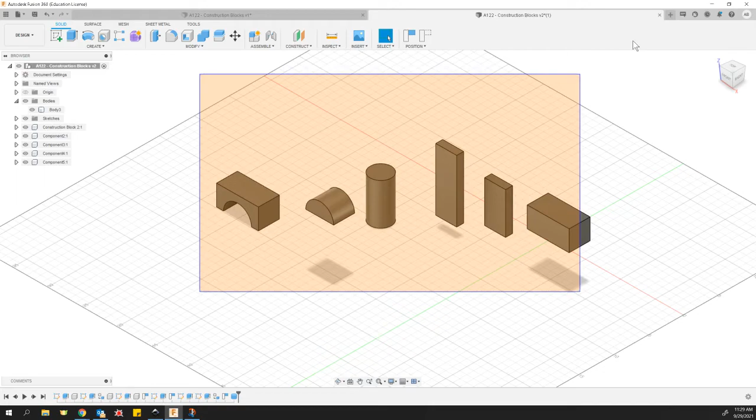So we're going to make this block right here. When you're done with all these and have them lined up like this, I'd like to see it from the isometric, the home view, and you're going to take a screenshot like this to turn in.

If you forget how to take a screenshot of those parts, use the snipping tool. Click on the start button to find snip and sketch, then click the new button, and drag a box around what you want to keep.

What's important that you keep here is your initials in the corner. I want to make sure that's in my screenshot, like you're an artist signing their work. You can even highlight it if you want to.

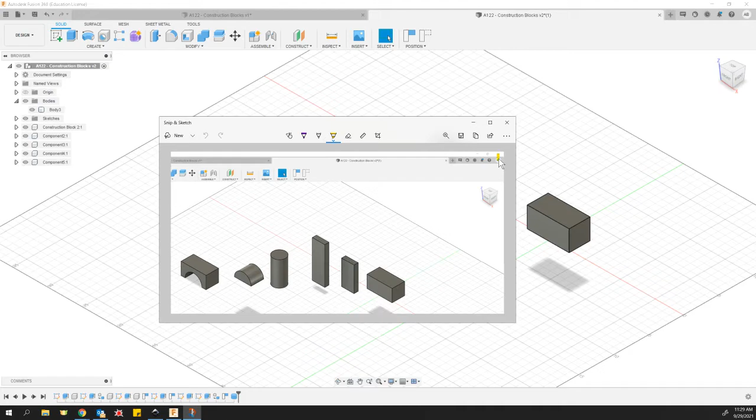So in order to make this archway looking block right here, I'm going to show you what I did. I'm actually just going to delete the part itself, delete my component.

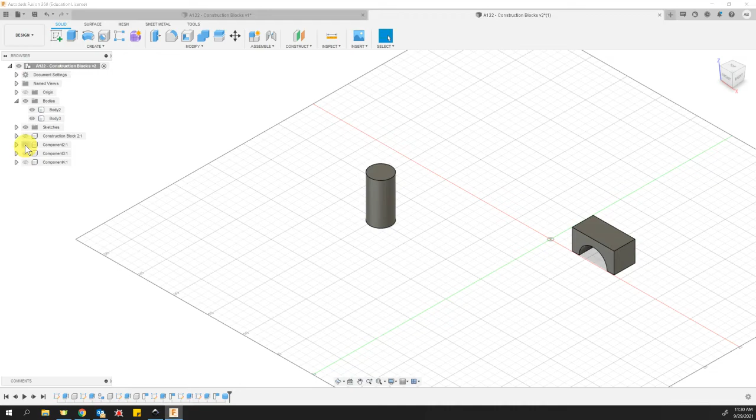Now you may have turned off or hidden some of your components. If you have sketches hidden, you don't want that. You can hide construction, you can hide components if you want, it doesn't really matter, just make sure they're unhidden when you go to take your screenshot.

Let's make this part right here. Okay, so I've got it as a body right now. One thing we're going to cover later: bodies are fixed in space, we can't move them. You see how I'm able to move these things?

That's because, not this one, that must be a body. See how I'm able to move some of these around freely? That's when they're a component. When they are bodies, they are stuck to wherever you design them in space. So to convert them from a body to a component, watch what I do here.

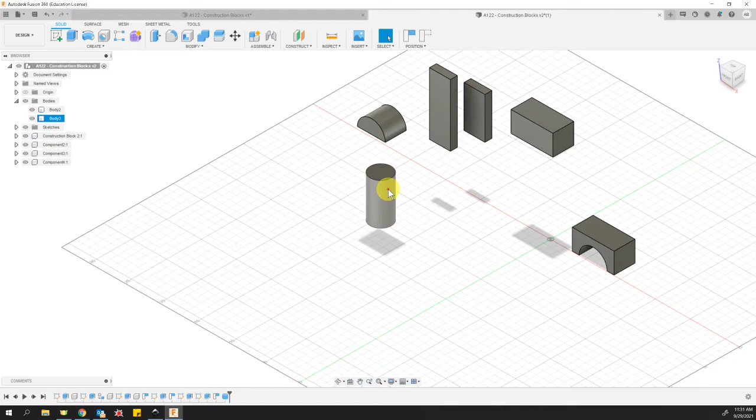The cylinder, I come over here and find body, right click on it, and create components from bodies. It converts it from a body, and now it's able to be freely moved about.

As I was saying earlier, I wanted to erase this archway and show you exactly how to build that. So I'm going to erase this body altogether, and we're going to make a new one. Now it's saying my sketch is no longer needed, so I'll delete the sketch too.

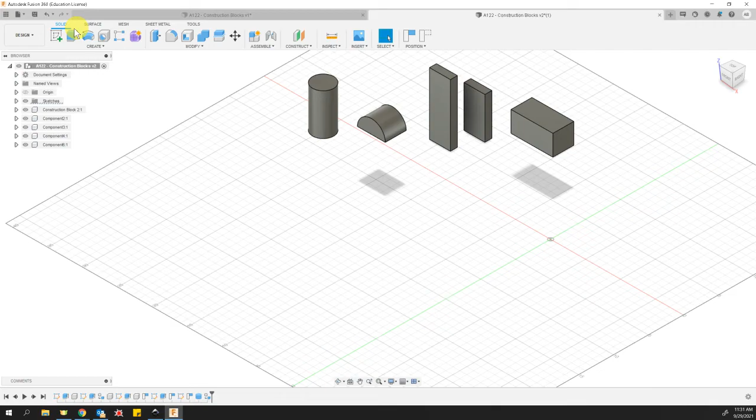To make a new shape here, I'm going to go up and create a sketch. I get to choose: do I want to sketch on the front, the side, or the top? Looking at what we're trying to make, I think it's pretty clear we're gonna sketch on the front, right? So we're gonna choose our front plane.

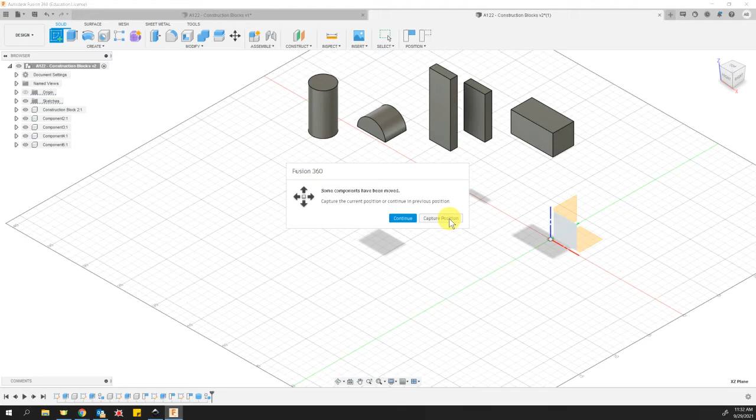This is just asking, hey, I moved around some of these pieces, do I want to leave them where they are, which is capture position, or cancel moving them and continue? I want to leave them where they are by capturing the position. So now I'm on the front, you can see that on my view cube. I'm drawing on the front plane, okay?

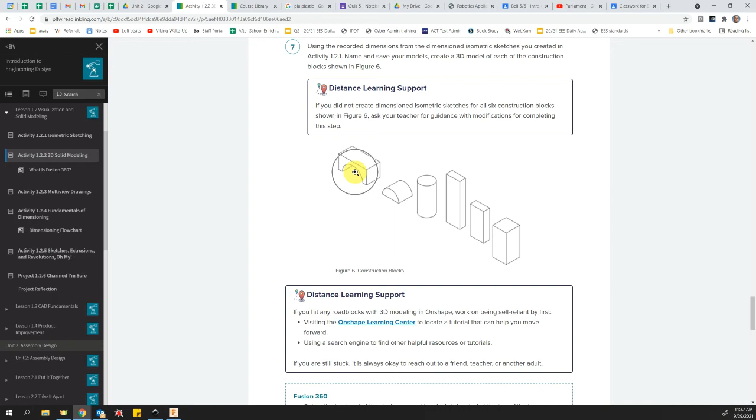And I want to just make that archway shape. Let's take a quick look at the archway and what it actually is. If you look at it, it's the same shape as what we've already built down here, isn't it? Same 3D shape, it just has something removed from it, that little archway, that little semicircle removed.

Subtractive is what we're doing now. We're starting with a wood block and then carving out and removing some of it. We're going to do some subtractive modeling right here. We're going to make this 3D block shape again, and this time we're gonna remove that little archway. So let's go ahead and do that.

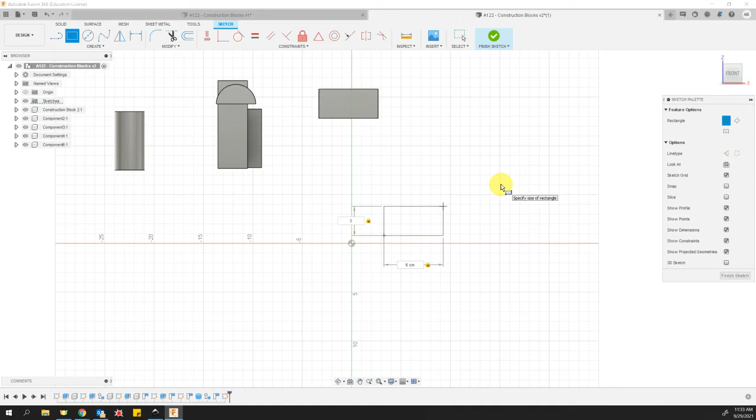You guys know exactly how to make a shape and extrude it, a rectangular shape. We're going to make it 6 centimeters wide and 3 centimeters tall, just like the other ones. We'll finish the sketch and then go to isometric view.

It's always a good habit to go isometric after you finish a sketch. Then we're simply going to extrude it. This should be getting to be second nature for you by now, that whole sketch a shape and extrude it, perfect.

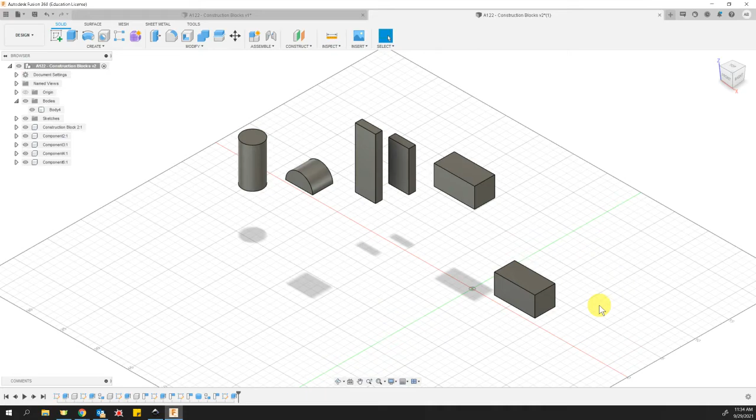So now to do our subtractive modeling, what we're going to do is actually apply a sketch onto the shape itself. We're going to draw on the shape what we want to cut off of it.

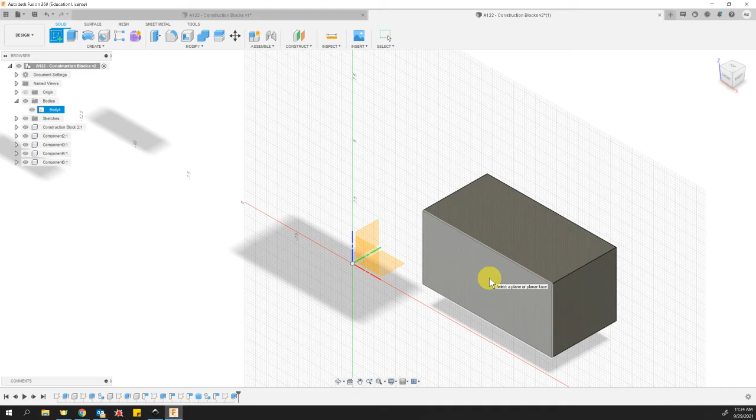We're going to go to a new sketch again, and this time, instead of choosing one of our 3 planes, we're actually going to zoom in and choose the front of the box to sketch on. So it turns and faces that front of the box, at which point we can draw our semicircle.

Remember, a semicircle is just half of a circle, which means the center point of our circle is going to be directly on the bottom edge of our block. I'll show you how to do that.

Let's go up and select not the rectangle tool this time, but the circle tool. Here's the thing about circles: you click once to place the center point, then you move away until your diameter is what you want it to be. This particular diameter is going to be 4 centimeters, but it's not going to be up here.

So I'm going to press Escape on my keyboard to cancel what I was doing. Escape is a good key to know. All right, let's try that again, and this time we'll place the center where we want it to be.

We want the center to be midway between this bottom corner and this bottom corner. So if you hover on both those corners and then move to the center, it should snap just like that. Did you see that little snap? Snap to the center, and it gives me a little triangle.

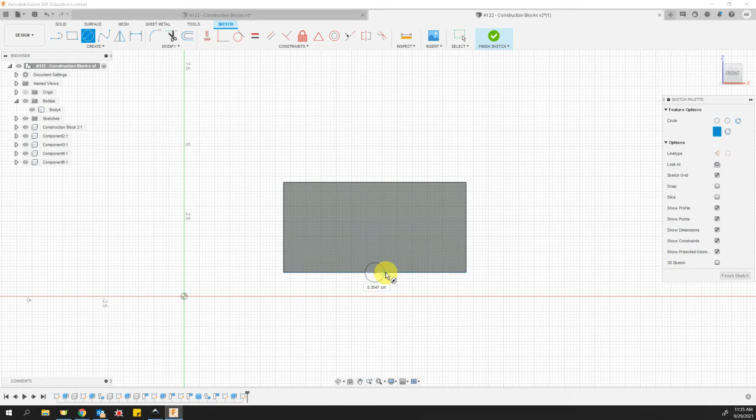It may be hard to see on your screen, but there's a little triangle right there that indicates that's the center of that line, the midpoint of that line. And that is where we want to click to start our circle. So I clicked, then as I move away on that straight line, it changes the dimensions of my circle.

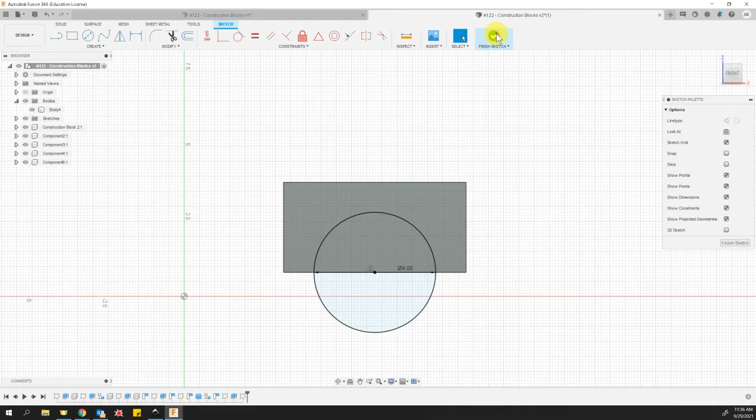Let's go ahead and get that to be 4, just by simply typing in a 4, enter. Ladies and gentlemen, that's all you need to do. That's all that we needed to sketch. We'll go ahead and say finish sketch. And do you see how that line draws what we want to take away?

So now we're going to learn something new. It's kind of old, actually, we kind of already know it, and it's an extrude. So now with the extrude tool, we're going to choose what we want to extrude, and it's this little archway in here.

Now, the way that we used to extrude was by dragging this out. That's called a join operation, we're adding material to what's already there. Do you see that? That's not what we're trying to do, is it?

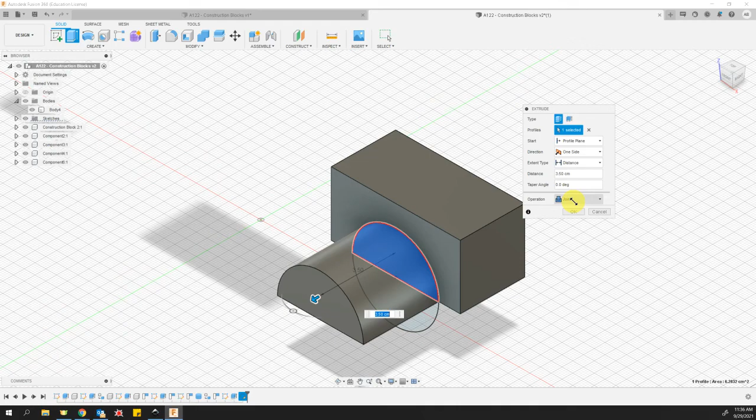We're not trying to add material. We actually want to go in this way, and we want to cut material away. Now, look, as we drag this through, look what we're seeing in our dialog box. What did that join change to? It changed to cut. It knows by going through what was already there, we're removing material away.

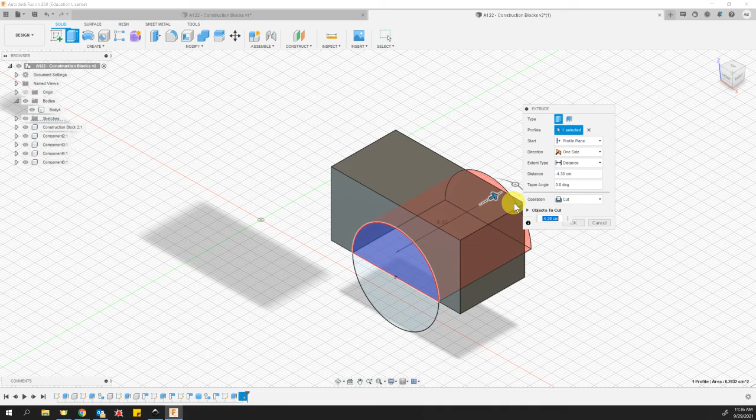And we just want to say yes, that is exactly what we're trying to do. So we click OK, and look at that, we got a nice little archway that goes right through the block. Pretty simple, right?

Remember, right now I've got it as a body. What does that mean? It means I can't drag it around. I know that it's a body because it's located right here under the bodies folder on my browser. If I wanted to convert that back to a component to make it movable, I would want to right click on the particular body and create components from bodies.

There we go. A similar process can be done making this archway. It's still just a circle, okay? But in this case, you're going to sketch a line that goes across it, and we're only going to extrude half of the circle.

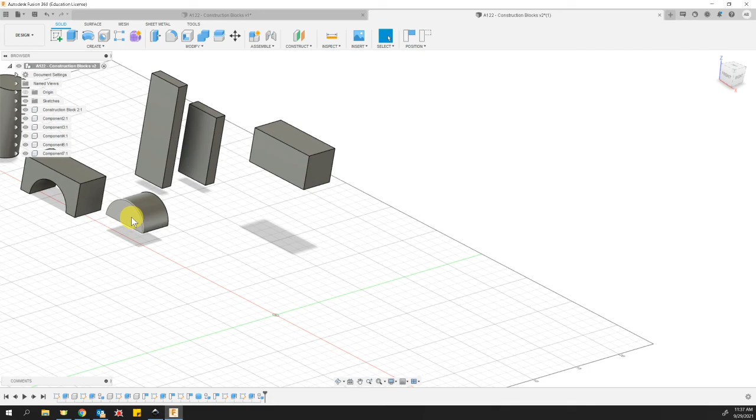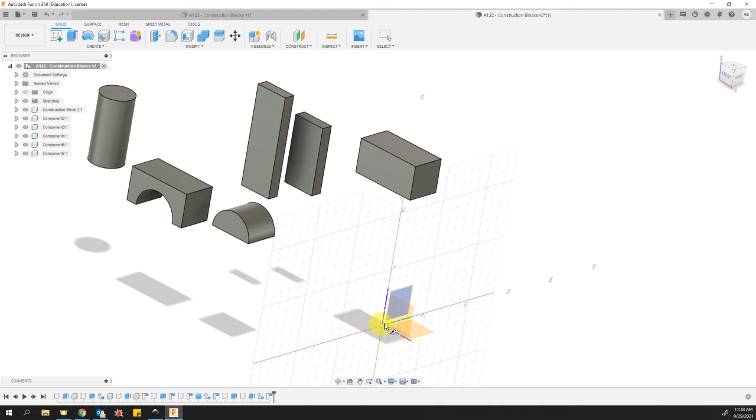Cylinder, pretty easy as well. Sketch a circle on the bottom plane and drag it, extrude it straight up. There's also some options over here, such as cylinder, it's called a primitive shape. So you could choose to just make a cylinder like that.

However you decide to do it works for me. When you have everything lined up and you've got it all in a nice little line here, that's when I would like for you to take your screenshot.